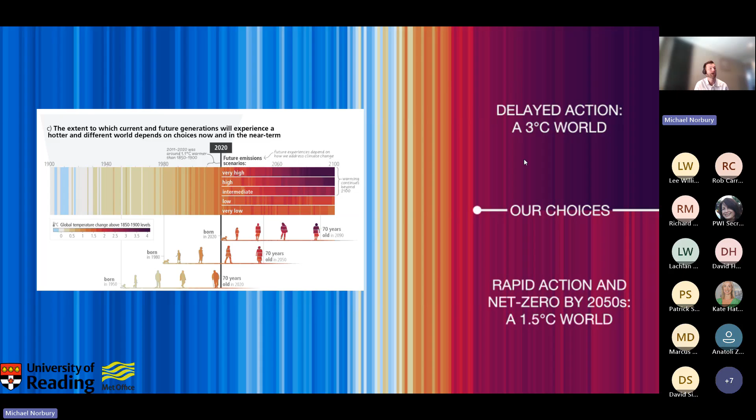And this is why climate - what's my why? I think it goes way back. I remember the 2012 flooding in Newcastle, and just the sheer ferocity of that Thunder Thursday when lightning struck the Tyne Bridge, and just the devastation that caused. Really climate change strikes at the heart of just how vulnerable the fabric of life is, really.

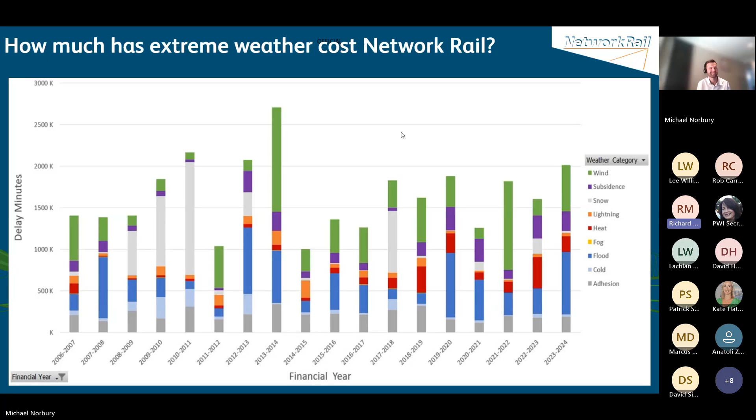And I've got silence. Is anyone willing to hazard a guess as to what the cost may be? Richard, do you want to hazard a guess or not? I don't want to put you on the spot too much. No, I can't remember. Yeah, no, that's fine.

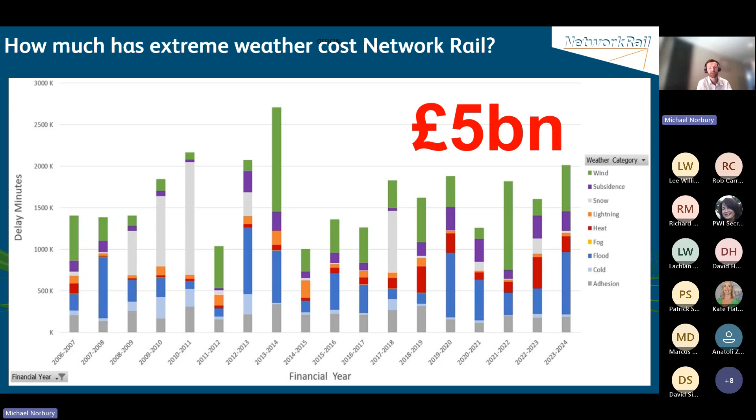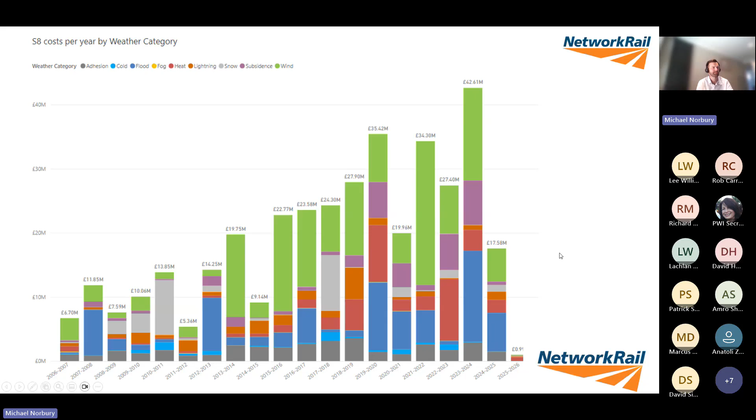So the cost is £5 billion since 2006-07. That is more than the entire 5-year funding settlement, for instance, for Wales and Western. So it's considerable. And in North West and Central, so London to Gretna, we are part of that picture. This is published data, but these are the costs, and that graph is going the wrong way. That is money that we could spend on doing good stuff. But I think the important thing to say is the resilience is in our hands, and it is within our gift to invest to save when it comes to climate change, to avoid those costs and also increase efficiency sometimes.

And it's not a given that we've got trust to run that system. It's under a license with the government, and that's why it's really important. And whilst this was in Norfolk, this could have equally been on the Mersey, on that freight line I mentioned earlier, or somewhere else on the West Coast Main Line South. So everything is connected, I'd say, and that's really important to remember.

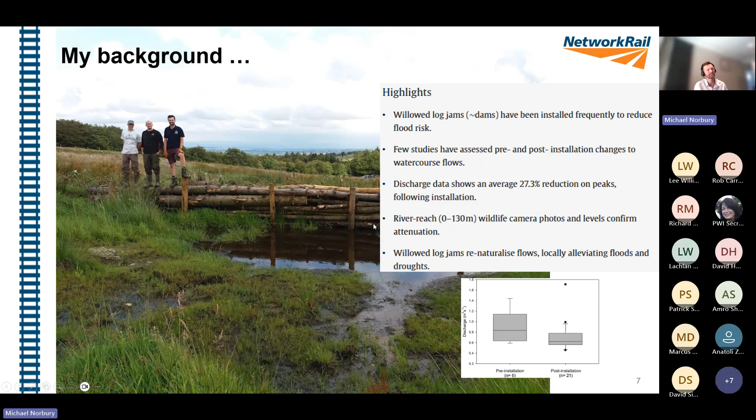It's also alleviating drought risk, which is really topical at the moment, because the water's not just running off the land, it's actually staying on the land for longer and recharging groundwaters. My colleague at the University of Liverpool, Neil MacDonald, is writing and citing this paper in that article to show there is a benefit.

So how did all that come about? This is somewhere in Cumbria, where they built the flood defence, which got overtopped, so they put some glass panels on top of the flood defence, and I think it's since overtopped that too. Also, they had a log smash into one of these glass panels and send loads of water through. So it was a bit of a wake-up call when things like Storm Desmond in 2015 were going on - how high can you realistically build this thing in a town which has great heritage and tourist value? You can actually store up problems by doing this, because you create sediment in the channel bed, so you're in an arms race building the defence against an increasing water level.

And it is the case that abroad in places like China, but also in the UK, we've perched our rivers up in the air because of this approach.

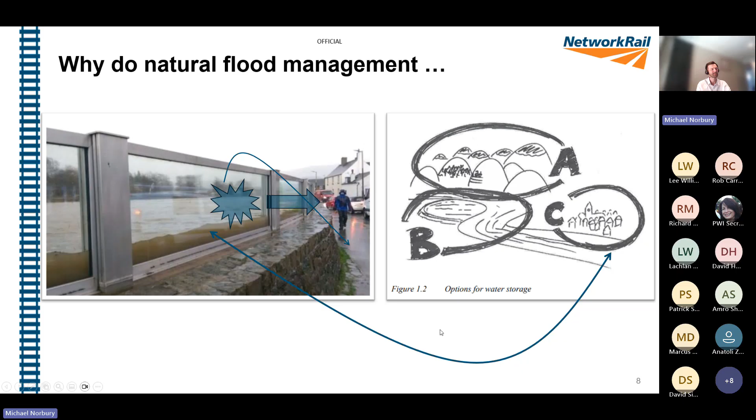So C floods this area down here, but also we have the river upstream, so at point B we could put big wetlands in, and at point A we can do storage in the hills. That's really where I thought, well, if there's too much water coming through here, what about up here that's covered in sheep and everything else, and there's barely a tree in sight? Can we look to slow, store, and intercept floodwater?

So my background has been working with a huge variety of partners to co-deliver nature-based solutions across all those things you can see on the screen there, and to support government in the guidance in relation to that work.

And crucially on the railway, we've got things like - if you were to search Eden Rivers Trust River Petteril scheme - we've got a scheme looking to move a river from an earthwork at the moment to prevent scour, and that builds on past work such as Thrimby Grange, a river leaf scheme we did just north of Penrith, and also places like Shap and Tebay on the West Coast Main Line North.

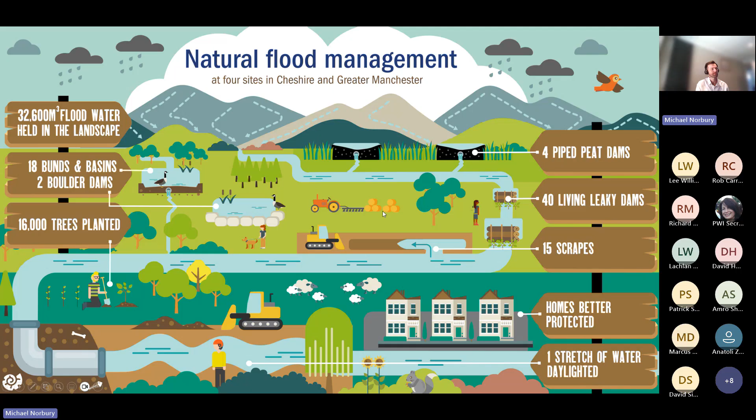This might be a valuable technique to reduce risk. And why would I say that? Because if you think about certain challenges like cross drainage - putting one flow pathway perpendicular to another, making it turn at a right angle - that's quite a challenge for water. It generally doesn't like to do that, and actually slowing it up in the catchment might make more sense, and it might be more financially efficient to do so if you've got willing landowners and a partnership approach.

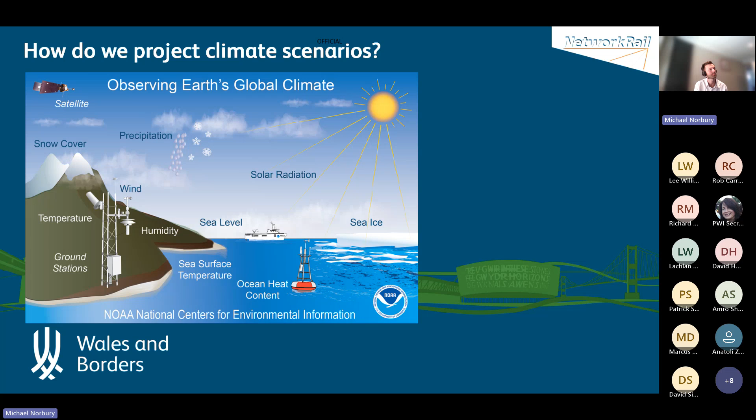The National Oceanography Centre, Committee on Climate Change, National Infrastructure Commission - they've changed their name now to NISTA - but real subject matter experts, and they use those sensors there to detect changes in the earth.

And this is just in observational terms - basically seeing more greenhouse gases, more ocean warming, more sea level rise, higher temperatures, now reaching about 1.2 degrees above pre-industrial temperature, more warming in the atmosphere, ice melting, cherry blossom change, humidity. And that's crucial because there's heat, but there's also humidity and solar intensity as aspects which can make assets suffer, but also people as well.

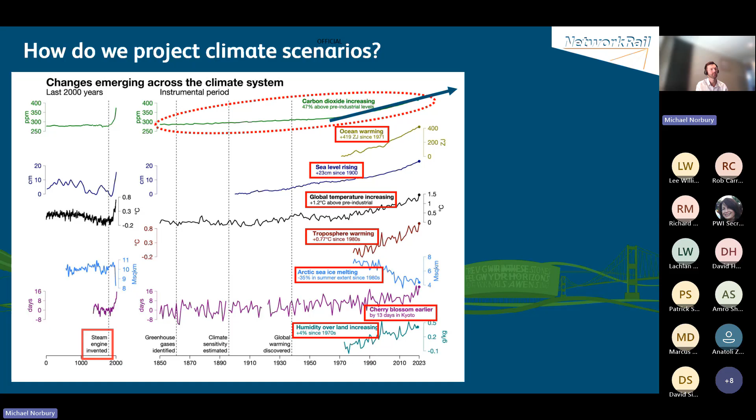So that's just to get a bit of a past look. And that past trend is used to inform representative concentration pathways - I wish I didn't call them that - but high or low growth emission scenarios for emissions.

So we use those scenarios in Network Rail, and other infrastructure operators use those to project climate change into the future. So effectively, days more above 40 degrees C become more probable, precipitation events over 30 millimeters per hour increasing fivefold by the century's end, so more monsoon-like rainfalls, and a metre of sea level rise.

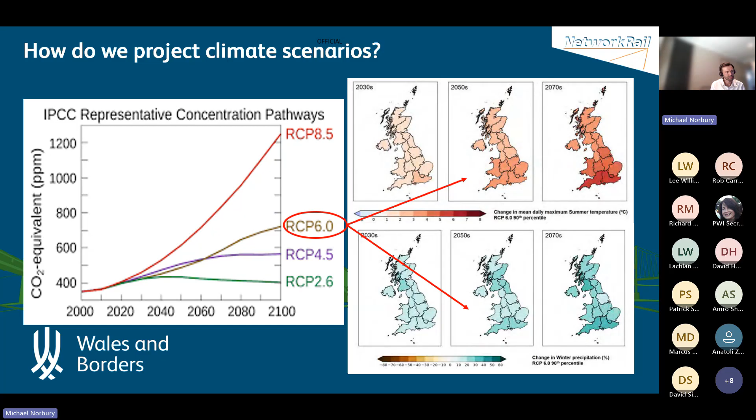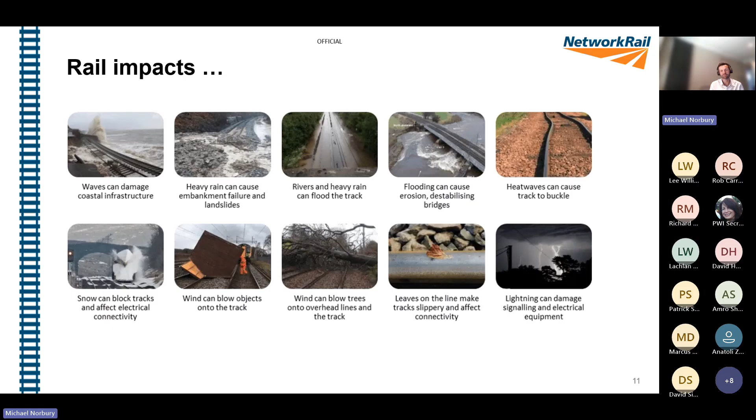Changing wind speeds, and all that has impact on the rail infrastructure, as this slide shows, from rail buckling, bridge scour, track flooding. We've got Dawlish over there, but you could equally have a Cumbrian coastal line in that photo, and things blowing onto the tracks. So, recently we had Storm Éowyn, basically closing the West Coast Main Line north of Preston.

I think we should be doing climate adaptation in projects, because it should just be like any other risk assessment. If there's a climate risk, there should be a control in relation to that risk. And crucially, climate adaptation is really now the law.

The new financial disclosure rules apply to big companies and they have to report them in their annual returns. But also the environmental permitting regulations, which apply to things like main river permits or infrastructure operations, like certain types of generators or waste disposal, they require a climate risk assessment and controls.

What we are seeing is an uptick in climate change lawsuits being applied to companies. Some of the penalties for failure are on this slide: asset failure, increased costs, cascading risks through interdependency—if our infrastructure fails, what about defence or energy generation, which have to move materials via the line—policy and regulation, and reputational damage and responsibility.

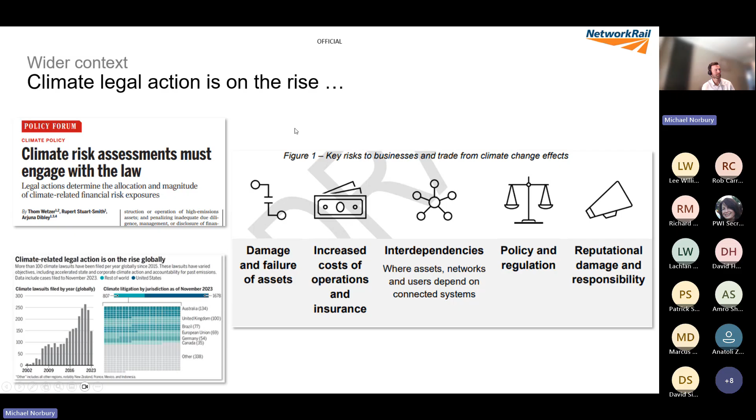This is a really good paper—climate risk assessments must engage with the law. So if there's anyone in the supply chain here, this is really topical as to why we should be implementing adaptation measures. This is just an example from the River Tyne, and this is not a rail bridge, but it just underlines the climate change permit risk assessment requirement.

This is the big flood that came through, and the scaffolding was still on the bridge, and a series of properties flooded nearby. The allegation was that this had impeded the passage of flood flow through that channel and increased floodwater levels, consequently increasing flooding to those properties.

That was subject to a Section 19 investigation of the Flood and Water Management Act by the Environment Agency. Clearly there may be some liabilities associated with the infrastructure operator for potentially, in that instance, not having suitable or effective measures in place to demount that scaffolding with a flood.

I appreciate everything can't be predicted, but what's the plan on a page? I wasn't too close to that, but I was aware of it when I worked in the Environment Agency.

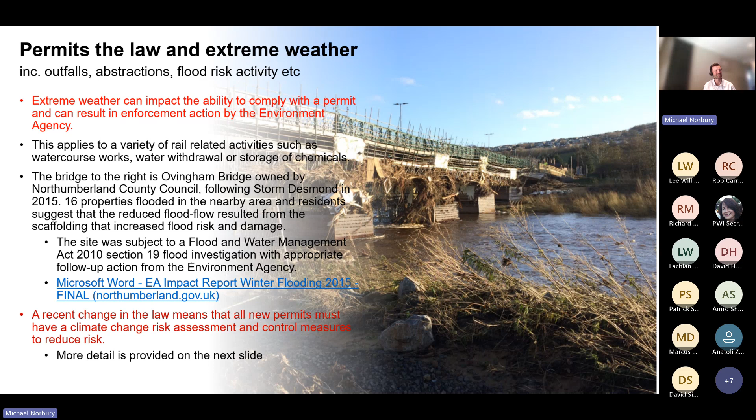The permitting requirements are in relation to temporary works like this, but also permanent works. If you've got a design life of, say, 1 in 60 years, for 60 years, or 120 years, is it going to actually last with climate change?

I guess to the audience, what you can do about it is identify climate risks, hazards, and implement control measures to those risks—so far as reasonably practicable. There's hazard, vulnerability, asset exposure, engineering codes, zoning, environmental standards. We have the ISO 14000 suite of standards. ISO 14090 is the adaptation pathway standard, but there are other ones that exist out there.

If we don't do the adaptation bit, we have a risk threshold, and the status quo just goes straight through that threshold, and safety, efficiency, and performance get impacted. But actually, if we take sustainable decisions, we stay on the white path here, which is sustainable and safe, and don't stray off into the unsustainable pathway.

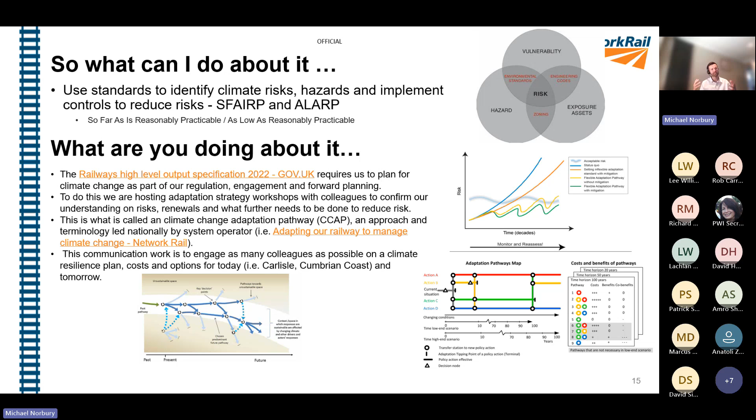I guess that's what I'm doing with colleagues—adaptation pathways and planning for the future in relation to locations. I'll come on to how that adaptation pathway approach applies, for instance, in somewhere like Carlisle, but effectively it looks at today and into the future and looks at the whole suite of options that can be taken in relation to an asset to keep it resilient and safe into the future.

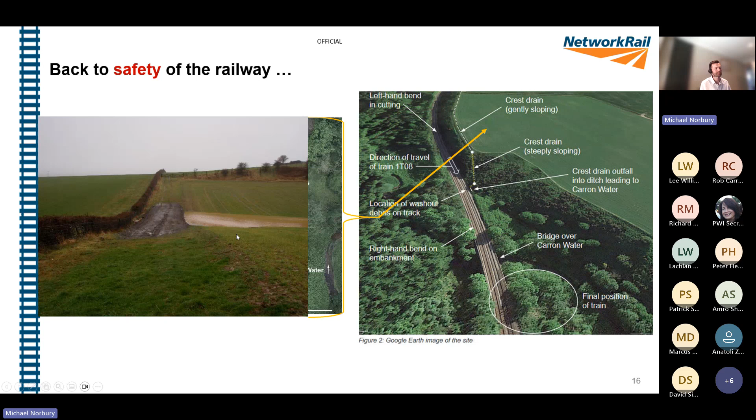Could it be the case that we, or agri-environment consultants, could put in a bund like this with a pipe through—this is in Northumberland—so when the intense storm comes through, it actually holds up the flood flow? If you do that enough times, it can reduce flood risk, as I was setting out earlier in relation to the work I'd done in Bolton. That work in Belford, Northumberland in 2015 won the ICE Robert Stephenson Award.

So, multiple things at play here, but actually if NFM were in here, how could it have been different? We don't know.

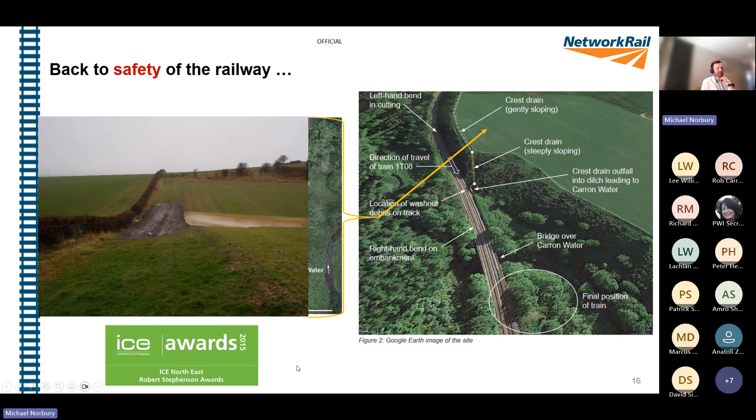It's speculation, but just a thought and observation.

In Northwest and Central, the adaptation pathways approach is built upon the principles of good asset management, focusing on critical assets and alignment with company policy. We're taking some of the most impacted lines and developing resilience plans for the future.

We've already had a workshop in Carlisle with the Environment Agency, and this week another workshop for Lancaster and the Scots border with engineering colleagues, partners and stakeholders. In September we've got a workshop on the Cumbrian coastal lines, and future workshops on the Eastern Throat and elsewhere, creating discrete business cases for resilience.

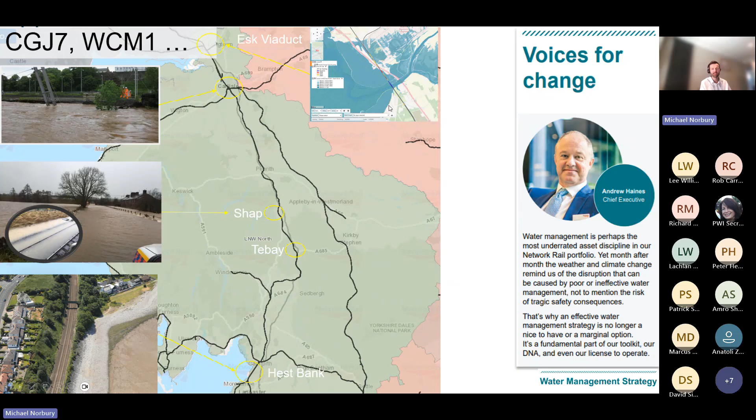This is the West Coast Main Line North. It's got Hest Bank, where it's at coastal risk, Shap and Tebay, Carlisle, and the Esk Viaduct, which suggests in the future that water may get onto the track. You look at the flood modelling, and again at places like Tebay, you've got runoff and earthwork challenges.

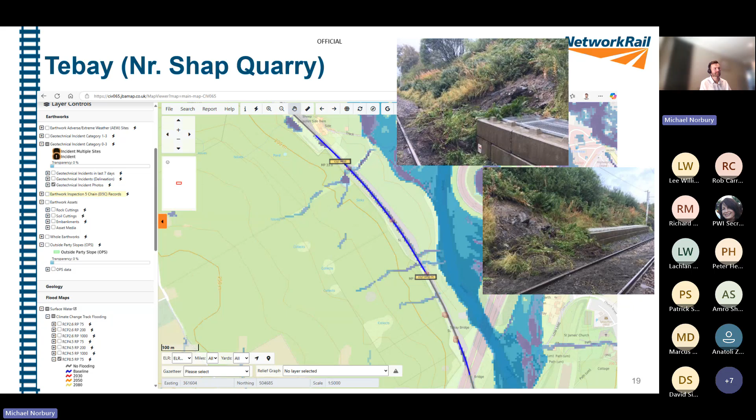In that landscape on Loups Fell, land draining down presents flood risk to the railway. Could we put in things like ponds, which capture flood flow and slow the flow off intensively drained moorland? At Shap, could we put in things like wooden fences, so in dry flow, most of the 95% doing nothing, and in flood flow capturing flood peak?

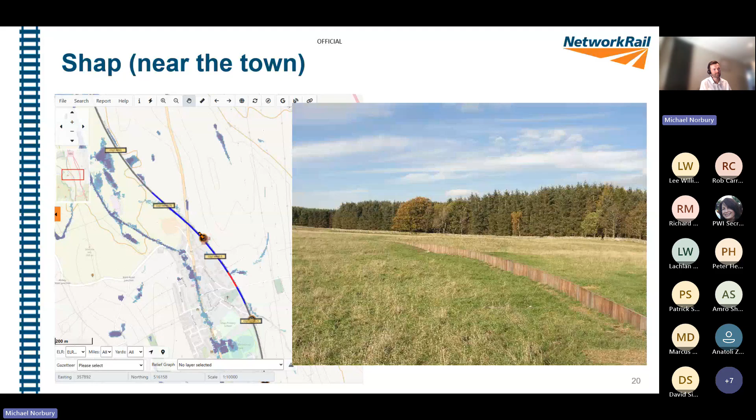This is really intensively grazed pasture, nibbled to an inch of its life. More damaged grassland produces more sediment and more runoff, and if we could get some longer grasses on these buffer zones, that might help Network Rail out.

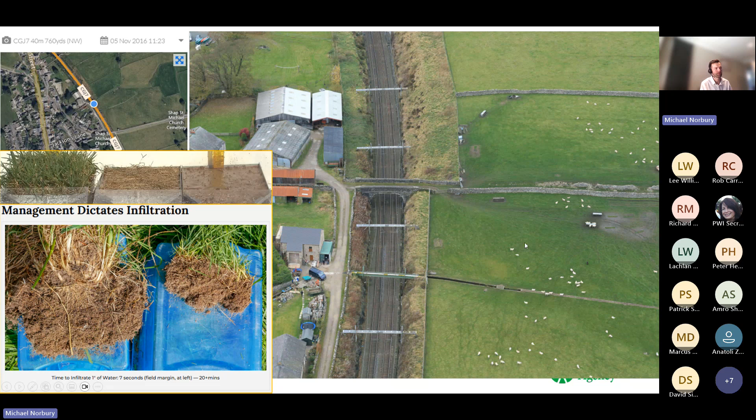The difference can be infiltration time of 7 seconds to 20 minutes. Ultimately we want that really fast infiltration of water, deeper roots, more water going into the ground rather than running off into the cutting or flooding the town itself.

This is global heating, and fires have caused us a huge headache. The University of Birmingham have analysed Network Rail records to find there's been 35,000 fire incidents since 2006, resulting in delay costs of 207 million, and about 14,000 fires within 30 metres of the railway since 2010.

That's got close to places like the Trans-Pennine route. This year we've seen a record year in terms of fires, both lineside but also areas over 30 hectares or larger being burnt - fires around Newport to Cardiff, on the Highland line where the Jacobite steam train runs.

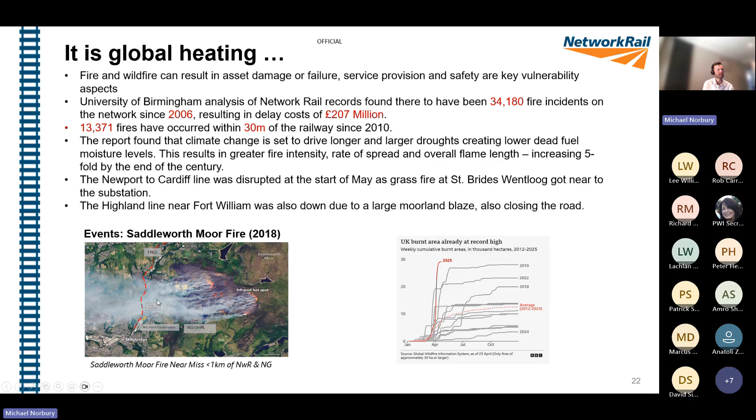The University of Birmingham have done some really good mapping on polygons of burnt areas, but also points of fires, putting that into maps. In terms of rail operations, that's quite crucial, because we need to think carefully about steam train operations and vulnerability of earthworks and other things.

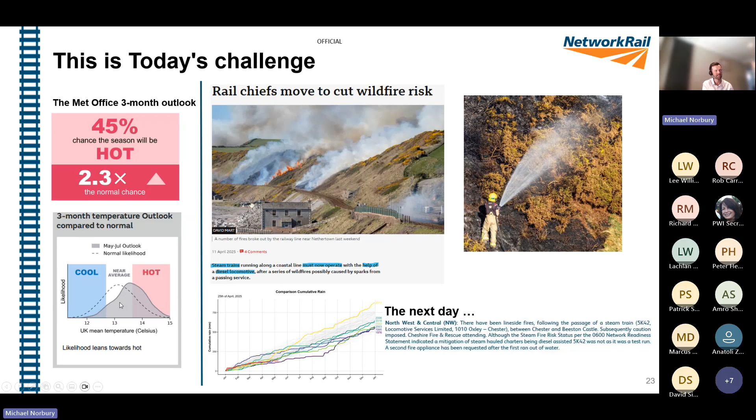The outlook at the moment from the Met Office 3-month forecast is for it to be hot, more probably more hot than the average compared to the baseline, so removing those sources of ignition is going to be crucial.

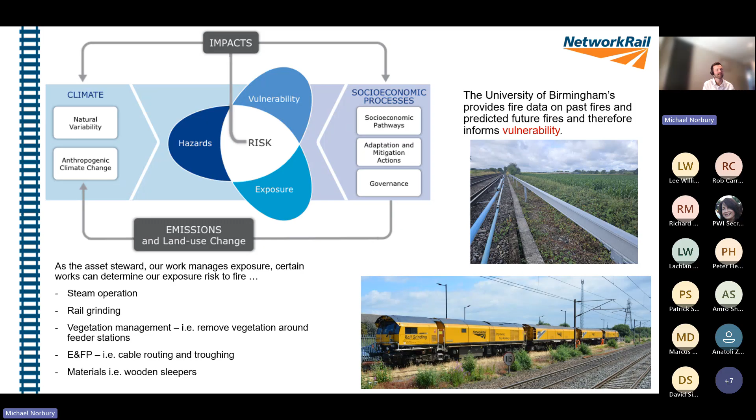That can span operations in relation to the railway, such as steam train operations, rail grinding, vegetation management, things like feeder stations, electrification of fixed plants, cable routing and troughing, and the materials used in the railway, such as sleepers. The mapping and modelling that the University of Birmingham has done has been really important.

Let's not forget, back to safety, that in 2022 in Spain - if you go online it's quite a scary video - a train goes into a fire. How do we warn against that?

There are new early warning system tools out there like Fire Insite and others. MetDesk supply our forecast, and that was a subject of conversation yesterday in terms of their fire index work on the daily forecast - how does that apply and prevent people being subject to risk on the network?

This is a road, Greenfield over Lancashire, Yorkshire Moors, where there's videos of people saying 'my dashboard's really hot,' with flames either side of the car, so potentially shouldn't have been there. The same thing could conceivably apply on the railway.

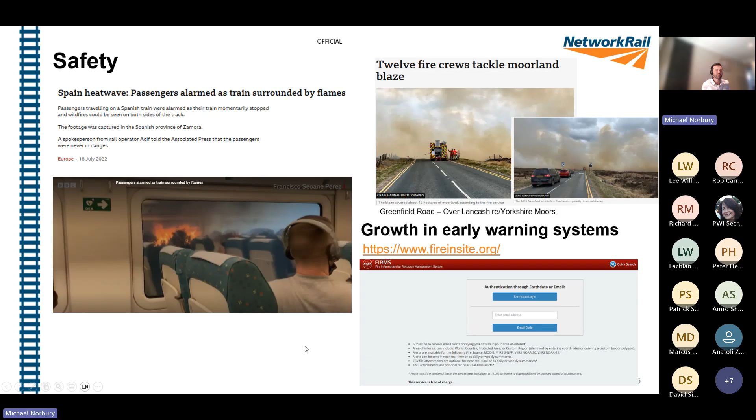But all isn't lost. Climate risk doesn't have to equal climate catastrophe. I think the work around natural flood management in the UK has shown that holding water in the landscape is a good thing. The Flow Partnership, an international charity I'm an associate of, has done work in Africa and India to hold water in the landscape, rejuvenate lands, and make sure vegetation isn't dead, but full of as much moisture as possible.

That links into our approach to biodiversity net gains. There's a planning requirement for any new development to achieve 10% more biodiversity and greenery post-development than before. For non-local authority developments, Network Rail is committed to a 4% gain by the end of CP7. So where there are multiple challenges, we can have multiple-issue, single-solution approaches rather than single-issue, single-solution measures.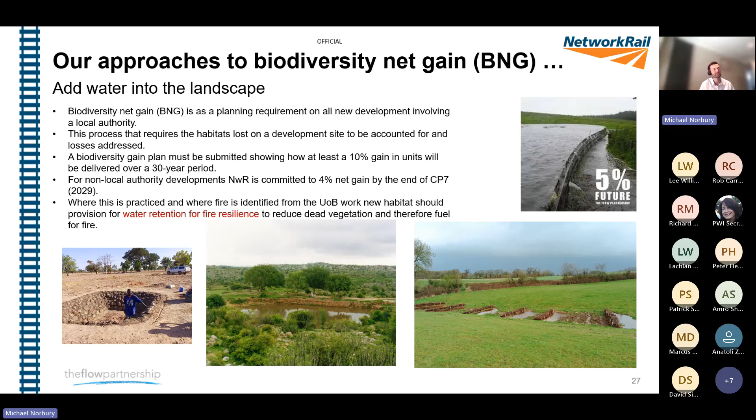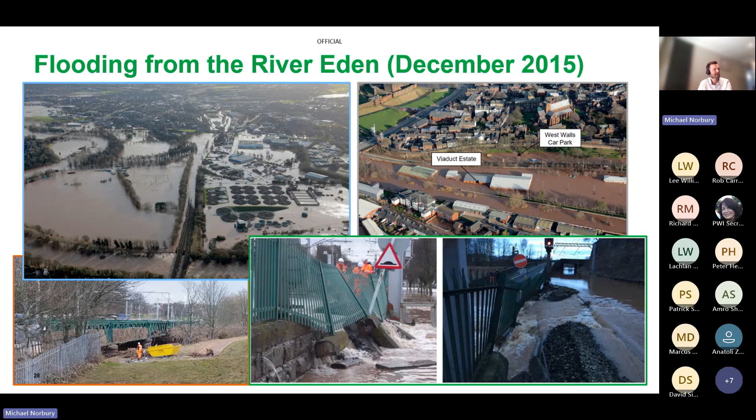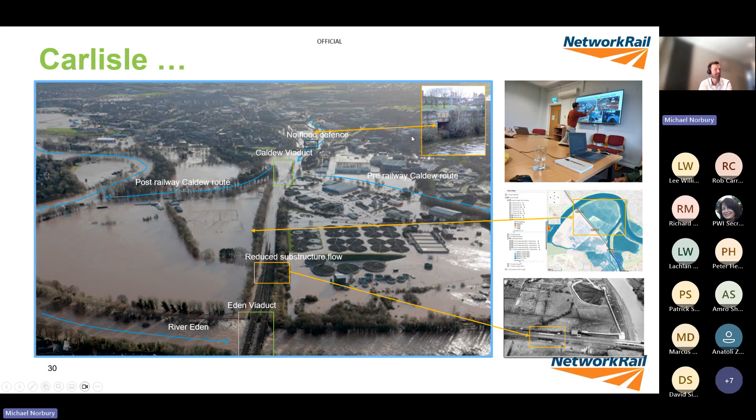That can drive resilience. Going back to the wet end of the spectrum and flood risk, Carlisle has been badly damaged through history by flooding, with some interesting watercourse routes. We've actually lost a lot of our sub-structure flow in that area over the years. Culverts like this are now being filled in, which traps flood water—you can see it on the flood map wearing off and presenting scour issues. It's trapped behind there, backed up the channel, and aggravated flooding of the railway line. We also have gaps in our defences.

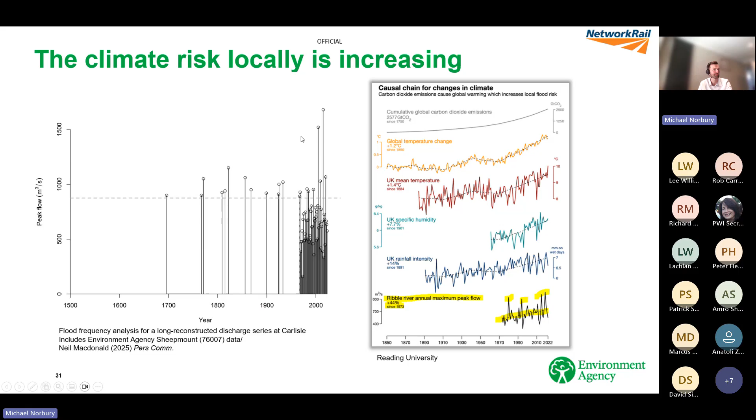This is why investment is safe: good colleagues did good work putting 19 locations—5 FSPs—on elevated platforms, which meant that between Storm Ciara and Storm Dennis, and Storm Desmond 5 years earlier, downtime was reduced. Desmond caused 14 days of disruption; 13 days were potentially avoided. Admittedly these were different magnitude events, but also 4.5 million pounds were avoided in Schedule 8 costs. So in a couple of years these measures paid for themselves, and over their lifetime will pay back far more—high level estimates suggest cost-to-benefit ratios of 1 to 7.

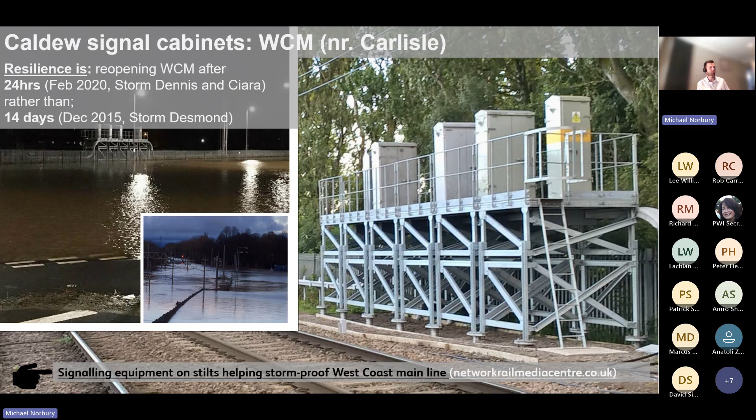My work is about saying: we've got a gap in the defence here, and defences that aren't at the quality they ought to be. Given that Storm Desmond destroyed part of the defence and water entered onto the line, can we infill the gaps in those defences to stop water getting on? We've got 7 points of operating equipment and 7 train protection warning systems there, all of which have to be replaced when it floods. Can we also open up this culvert, which goes under the car park, to drain the flood water after the peak?

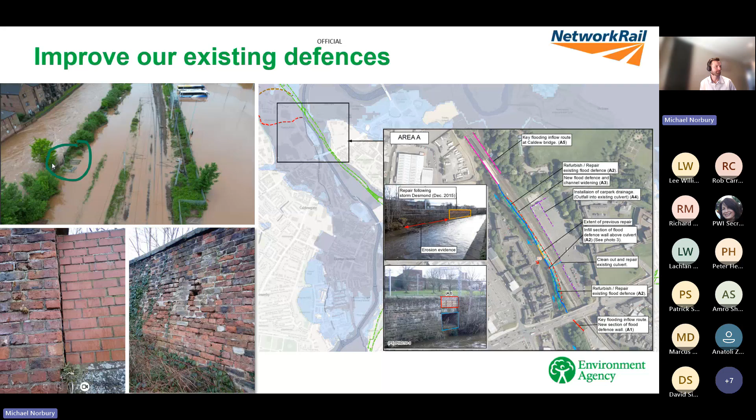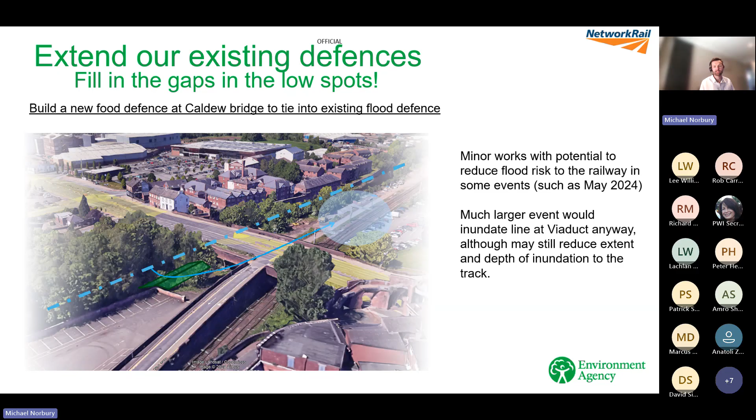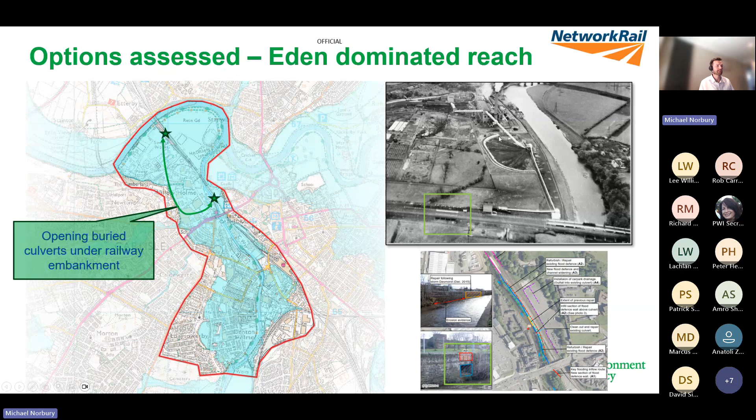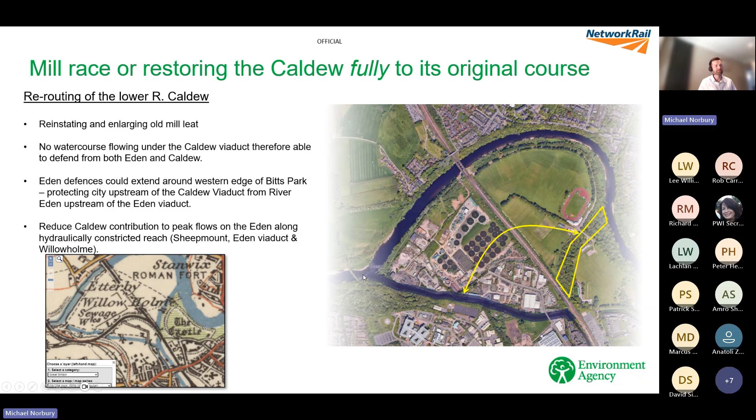The other thing that hasn't helped is that more water has been routed upstream. Water generally doesn't like to flow uphill, and that aggravates some of the flood risk challenges. So can we instead reinstate the channels that flow downstream, drop the water level, and reduce some of these challenges?

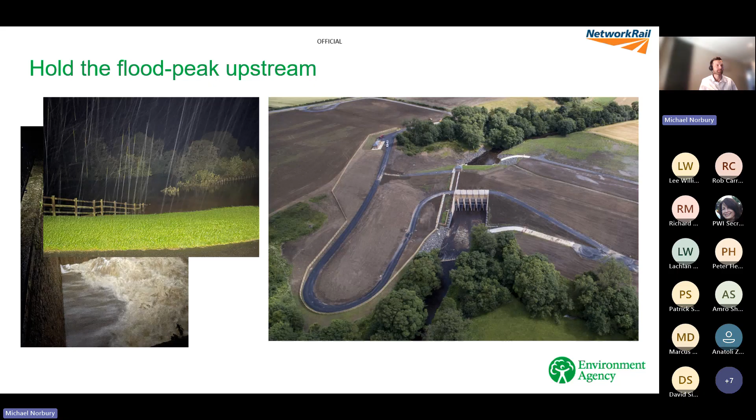Just to be realistic about the scale of water coming down these catchments—this is Mitford Dam in Northumberland, which I visited when I worked at the Environment Agency. It's huge: the tailwater is two miles long when it fills to the crest, flowing all the way backwards. We're looking at huge volumes of water to capture in these catchments flowing down through the Environment Agency and Network Rail networks if we're to meaningfully resolve flood risk.

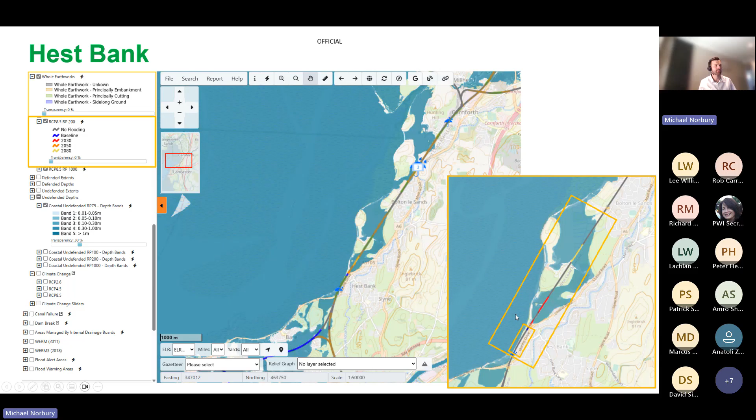You look at places like Hest Bank, we've got the West Coast Main Line coming along this coastal section, and there's a defence here. We have earthworks, but we also have flooding set to occur in the years ahead where we don't have defences. And when the railway was built, it looks like a bit of the shoreline may have been borrowed from the sea, and that presents vulnerability today. So we've got a defence here, but areas of no defence, and we might need to put defences in, given we've got level crossings here and trains come at high speed.

The speed restriction here is 110. So we've got this defence which has been worn away over the years from tidal action, and we also have low spots near the level crossing where we might need to look at some things. The defended area, this is a track elevation, is quite high, but drops near the level crossing and is quite low further down. And these are the peak tide water levels.

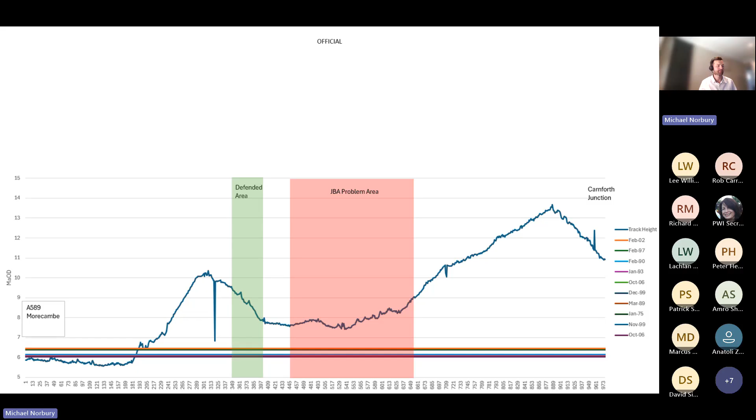And in Carlisle, again, with things like the defences, there's probably a 1 to 7 benefit ratio of spending that money versus the costs avoided of replacing the point operating equipment and the train protection warning systems. And actually, because it's the West Coast Main Line, should it actually be running? My personal feeling is the train should be able to run if it's raining fairly heavy through there - it is the West Coast Main Line. So these things do pay for themselves.

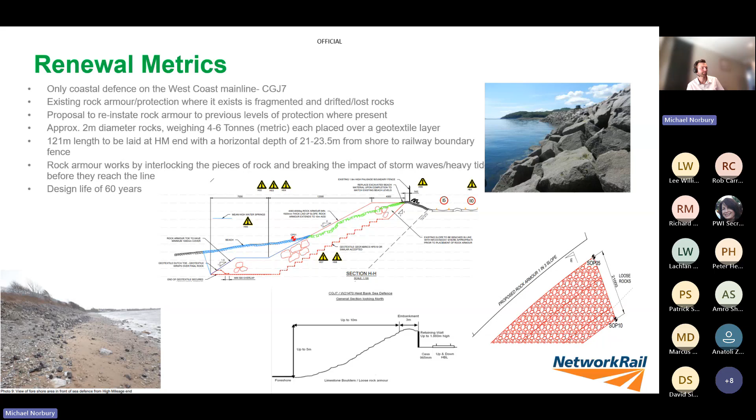So that's just a quick whistle-stop tour from me in terms of projects I've come close to and the resilience measures. At places like Hest Bank, I'm just starting to map out what additional funding might look like for defending the level crossing area where we have no defence, and potentially nature-based solutions like salt marsh work - what the cost might be, but also the benefits. And those are multiple benefits if we use nature-based solutions for carbon sequestration, as well as the benefits to the line itself.

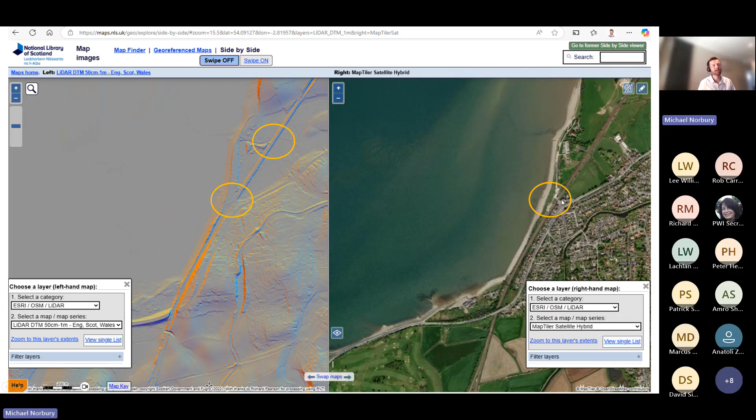My work is really in that sort of business planning space, about making things resilient for the future. I run these workshops every month, basically, with colleagues in Network Rail and also with colleagues in the train and freight operating companies and partners like the Environment Agency and local authority, to say, hey, these are the risks that I can see - what are the risks that you're aware of, and what can we do about them to increase performance and efficiency, and manage safety effectively, so it's a safe and effective, reliable railway. That's kind of my work in that space.

So I guess, what of the future? I think we are the stewards of today's railway, and I always think we should try to be good ancestors - try and do the best that we can.

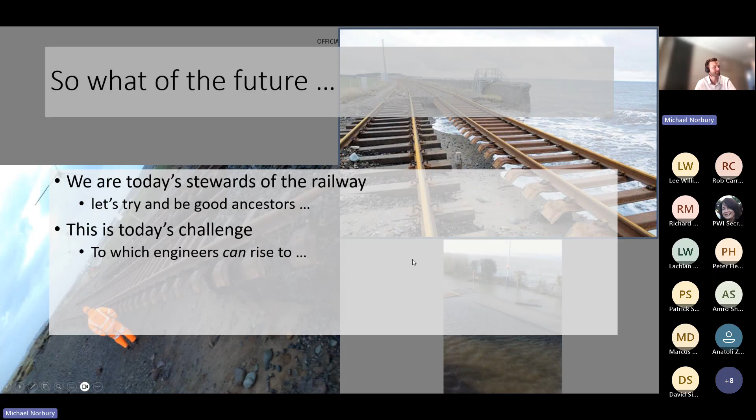This is definitely today's challenge, as the heat of today is probably underlining, and also how dry it has been. This is today's challenge, also tomorrow's, but it is the track beneath our feet today that we really need to get on top of, in terms of what we can do to invest to save and increase resilience. The resilience is in our hands - it is within our gift to do this stuff, but we have to make the case for why that is important. Things like storytelling, photographs, evidence are really important to that.

I would also say that no person is an island entire of themselves, and I think that's really important to remember - this definitely has to be a collective effort. I am one climate adaptation specialist, four days a week, in a region covering Gretna to Euston.

So I think there's definitely a huge scope for partnership work and collaboration to actually get that resilience delivered on the ground, and really develop a railway fit for the future, and which enhances the railway's reputation too.

So that's just a quick whistle-stop tour from myself in terms of some of the heat challenges on the network, particularly fire, but also some of the flood challenges on the West Coast main line. It is crucial, that artery route through the UK, given that 75% of the freight that arrives in Scotland comes by the West Coast main line, and there's no deep sea port in Scotland.

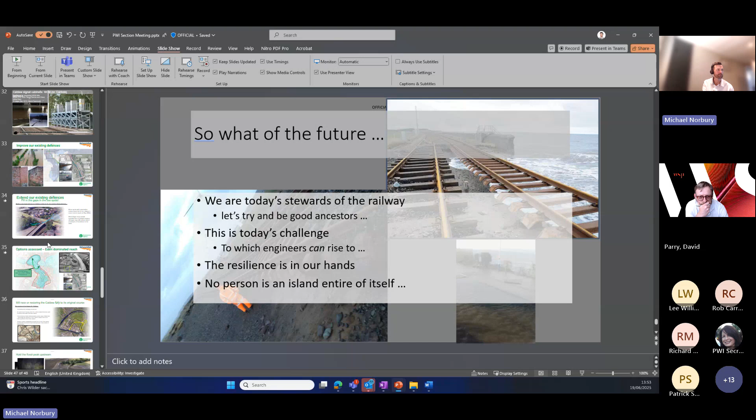I think Paul Quinn is a guy I used to work with a lot. He's at the James Hutton Institute now, and he was the EFRA, Environment, Food and Rural Affairs Special Advisor on future flooding. I think the important thing to remember is that he calls it the '5% future' - we're only after like 5% of their land for 5% of a given year. These measures fill and empty really quickly. This is water that comes on the landscape and passes off, so it's not always sat like this. Most of the year it's like this, so most landowners are good landowners.

They have got headwinds at the moment for sure - food prices, all the other stuff that's going on - but I think most people are fairly conscientious. I think the installation of the natural flood management is the quick bit, in my experience. The long bit is all the pre-work that gets to that stage, and then the work around the handover, the handback, around the health and safety file and all those things. So I think that's the thing to mention to them - that we're not flooding your land all the time, but also there are benefits.

The Woodland Trust had a great guide about trees in the farm landscape - shading, if we're hot, the sheep are going to be hot for sure because they've got big woolly coats on. So farmers actually like things like trees because it shades their cattle. And also, not selfishly, but they're business people, so they look at things in terms of returns. Sure, planting trees is a slow return, but actually timber price is some of the highest it's been - about 50 quid, I think, 10 years ago when I last looked, for the price of softwood. So there's an argument that if you did agroforestry or strips, then that can be thinned.

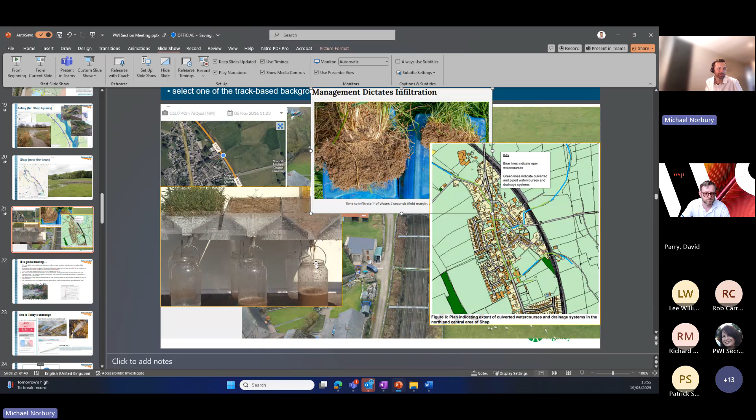I think also, do they want to be losing their topsoil off the land like this slide shows here? I wouldn't want to be losing that topsoil, given that phosphate costs a fortune at the moment. Actually, by farming a little less intensively, you get more in a weird way, because less feed, those sorts of things. Fundamentally, underlying all that is a compliance and liability point of view, that farmland shouldn't be flooding other people's land.

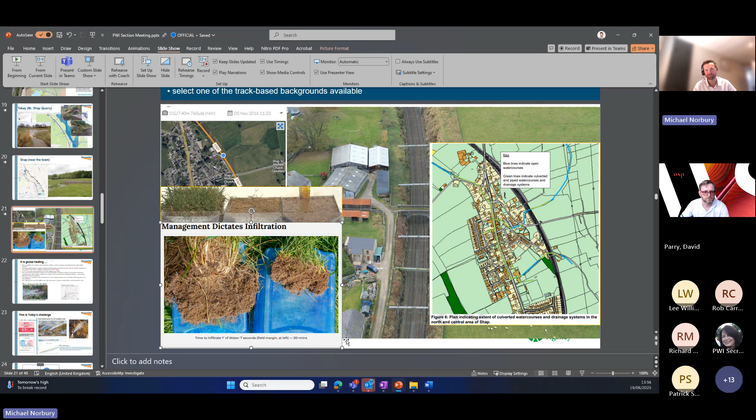But I think that would be my last point of conversation with any farmer - it's about working collaboratively. So every landowner is different, and you just have to work with who's willing. That can be frustrating, because sometimes hydrologically where you want to intervene isn't where you can always intervene. But if you find someone who says yes and is willing, you build the momentum from there, because what you often find is farmers looking over fences at other farmers, and a sort of snowball effect from there.

Does that answer your question, David? Yeah, it does, thanks.

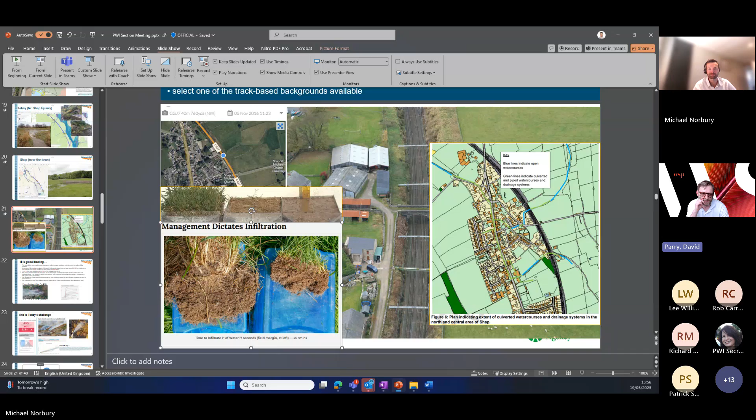I remember when I was working with Transport for Greater Manchester building the airport line, and we did quite a bit of work with the golf courses near the Mersey. They were complaining at the time about how much land they needed to basically retain water, and obviously they're just upstream of the outfall into the Mersey, which is what I think they're worried about. There wasn't so much land lost really, but it's the amount of work they needed to do to retain water on the land.

I think it's about communication, isn't it? Because when you have the defence so high up, like 7 meters of water trapped behind the defence, that's when that goes - that's a real liability to manage. Whereas if you take away, it might be more often but less ferociously, and actually fertilise the land.

So that's an interesting one that you worked on that patch. I run around there sometimes as well. So small world.

Right, any other questions? I did have another question actually - it was you mentioned about building the business case. I was wondering how you find that, obviously there's more pressure these days for tighter funding for infrastructure, and how you build a case for an event which could happen in a number of years, and I know it's happening more and more frequently, but how you build the business case based on the probability of events.